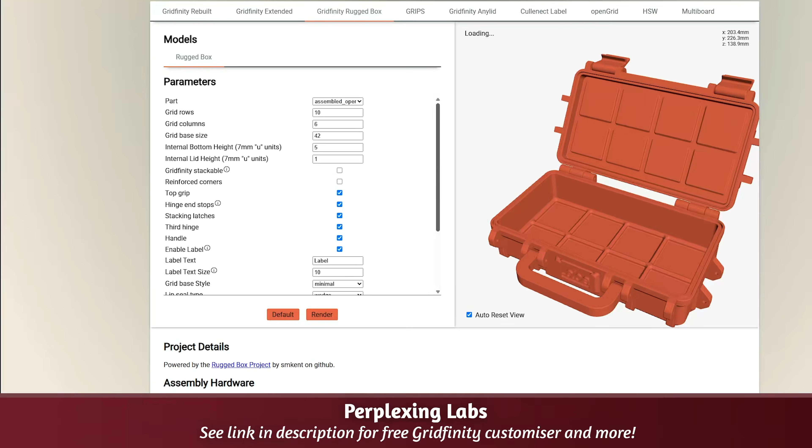Let's start with small horizontals. For me, the only sensible choice is Gridfinity. It continues to leap from strength to strength and has such a massive community. It's the only show in town in this space. It's retained that lovely simplicity of use whilst building an absolutely enormous range of parts. Pretty much any tool, device or component in your house will have a Gridfinity part for it. And for the rare parts that don't, there's an awesome range of plugins and customizers that let you trace parts from photos, generate your own custom bins, or design in tools like Fusion.

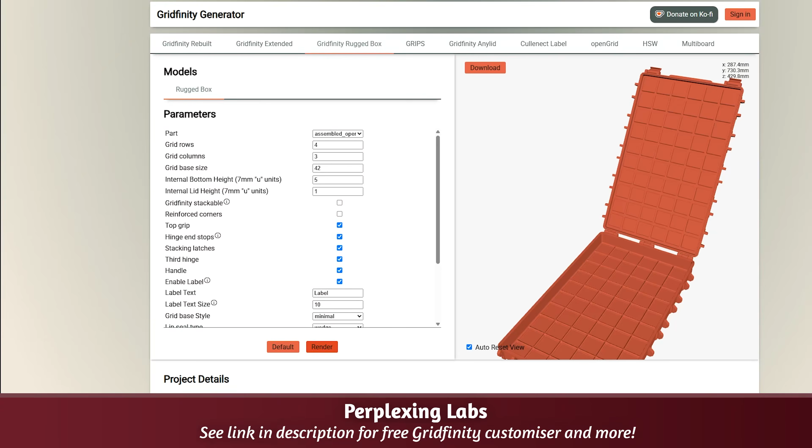Let me spotlight a few innovations I've spotted in the last year that add more capability without complexity. Click grids: there are several approaches, but the ability to grip bins without needing magnets is super helpful in some cases. Other larger holders like Gridfinity Rugged Box are great for people who want to take their Gridfinity bins on the move. General shout out to the amazing Perplexing Labs, which is basically the starting point for any systems. They've got generators for Gridfinity, openGrid and more, and even rugged box generators.

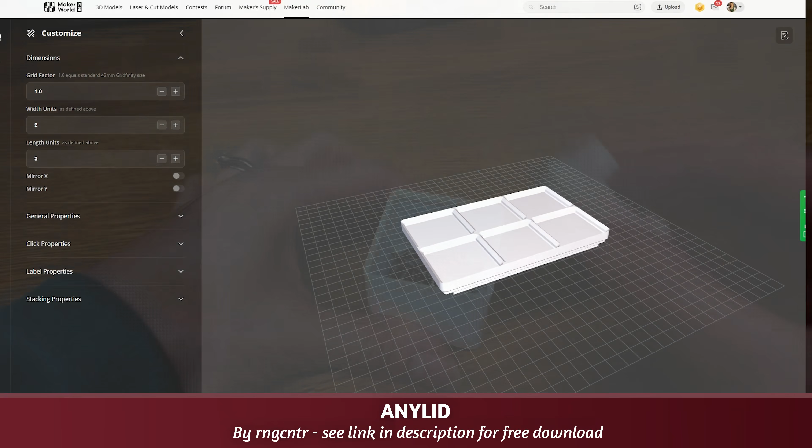Gridfinity labels have been another area of innovation. Cullenect labels are great for adding portable labels to your bins if that's helpful. I also love Anylid - as the name suggests, this lets you add lids to your Gridfinity bins. There are so many other options. One of my Discord members recently pointed out you can now have tambour doors on your bins if you like. And this is why Gridfinity Ecosystems is so cool. Just dive into MakerWorld and search for Gridfinity - it's such a vibrant ecosystem.

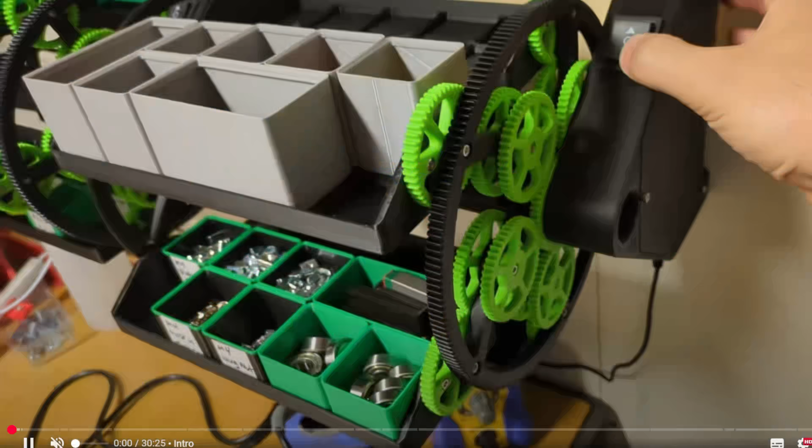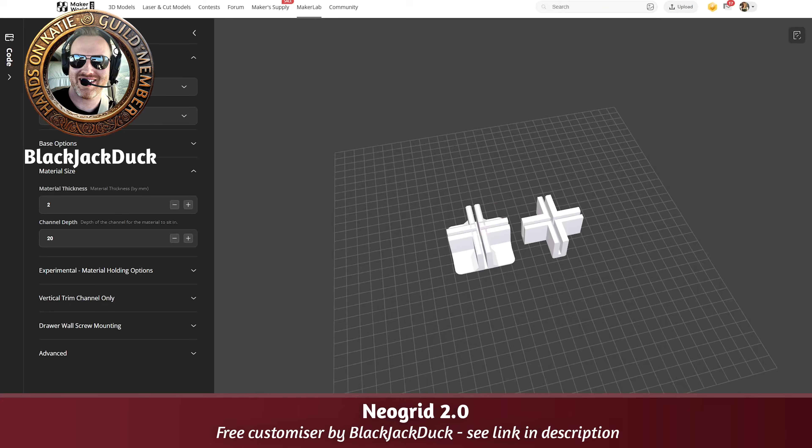Yet where Gridfinity starts to be inappropriate is with larger items. This is where last year I designed NeoGrid for my clothes drawers, workshop drawers, kitchen drawers and more. And it works great, but it's become so much better. NeoGrid 2.0 is now available, and it contains a year's worth of awesome improvements and ideas from the community, all wrapped up in an online customizer by the ever-brilliant Blackjack Duck that lets you tweak the thickness of your material to anything you can imagine.

Most importantly, whilst you can still use Gridfinity bases, after experiencing David D's openGrid option, I was instantly converted. Just look at that grip - it's amazing. Yet, does this not break compatibility with Gridfinity, I hear you say? Well, no. It is the perfect example of openGrid. Firstly, it's been designed to interoperate, so the grids line up neatly with Gridfinity - you could even mix and match them. But then Pedro, the Portuguese genius, and others have come up with adapters to tackle that problem. One piece instantly converts any grid that you need. This is super handy for me, as with NeoGrid I'd quite often have a big tool, ideal for NeoGrid, but a few small related parts I wanted to keep next to it, which is ideal for Gridfinity.

On we march to the large vertical items. You want to hang your lawnmower or filament reels, power tools or more - it's French cleats all the way home. Where all these 3D printed wall systems are messing around, proudly declaring their weights in tens of kilograms, French cleats deal in hundreds of kilograms instantly, if not thousands. But shortly after my video, another genius, Bastel-style, launched Frenchfinity.

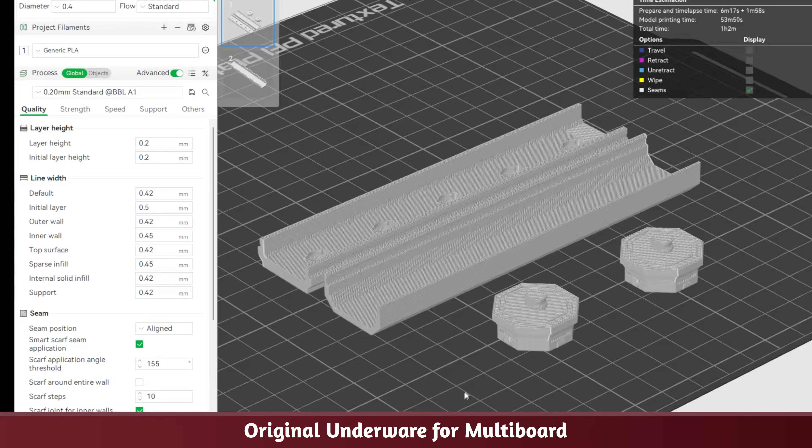For me, it was a no-brainer to cover the walls of the manufacturing zone in my workshop with this. And because it has such a strong grip, I've also used it to hold up my Underware under my desk. One benefit of using Underware with openGrid is that it's reduced from multiple pieces and snaps to a single click. As with everything, Pedro has built a customizer for this.

I'm using a transparent and shallower version to house the LEDs, which I'll come back to. Oh, and these Gridfinity shelves have been designed by DMG. You just print, click, and away you go. Unlike multiboard shelves, these fit perfectly with Gridfinity so you can have seamless edges forever, rather than those gaps. So we have now achieved perfect harmony across all these 4 systems.

Is this the end game for home organisation? Can we all pack up and enjoy our perfectly ordered abodes? Well, no. We now need to turn our attention to that elephant in the room, the next layer in organisational design that sits above all of the 4 systems: the aesthetics.

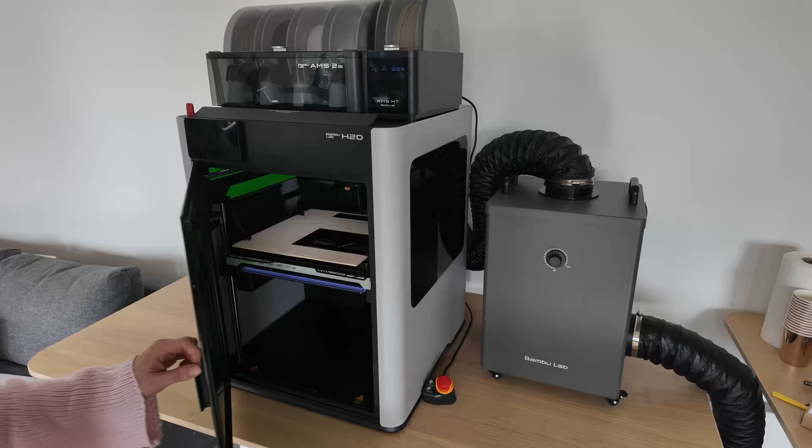How do we make these systems beautiful and smart? This is where I believe the new frontier lies, as an array of new technologies and tools arrives, focused no longer on simply making things, but on making nice things.

You can see my initial thinking and practice in my workshop, but this is just the start. There's a whole range of systems and features being designed by the Guild at the moment that I'll look to feature in upcoming videos. So keep an eye out for them.